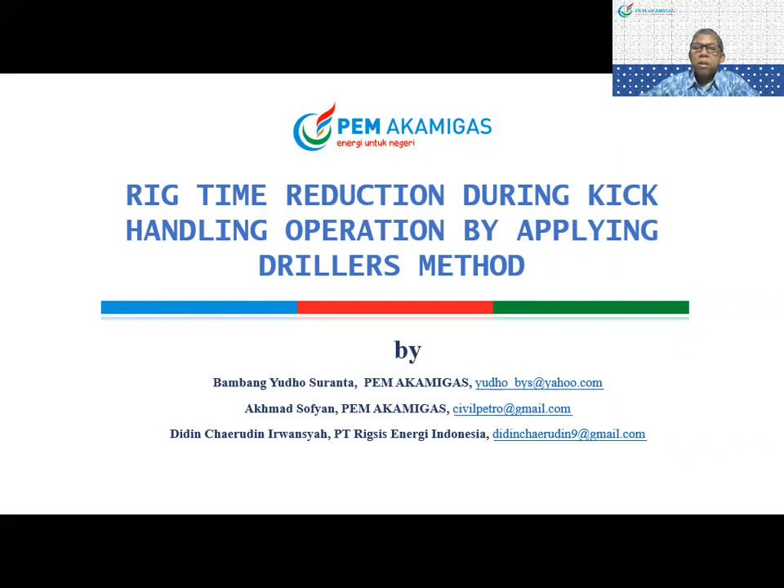Before we continue to the main presentation today, I would like to mention the outline of my presentation. There are 6 parts of main topic in my presentation. First, research background and objective. Second, kick handling and well control. Third, actual kick handling in exploration well X. Fourth, exploration well X kick handling analysis. Fifth, exploration well X handling recommendation. And the last, conclusions.

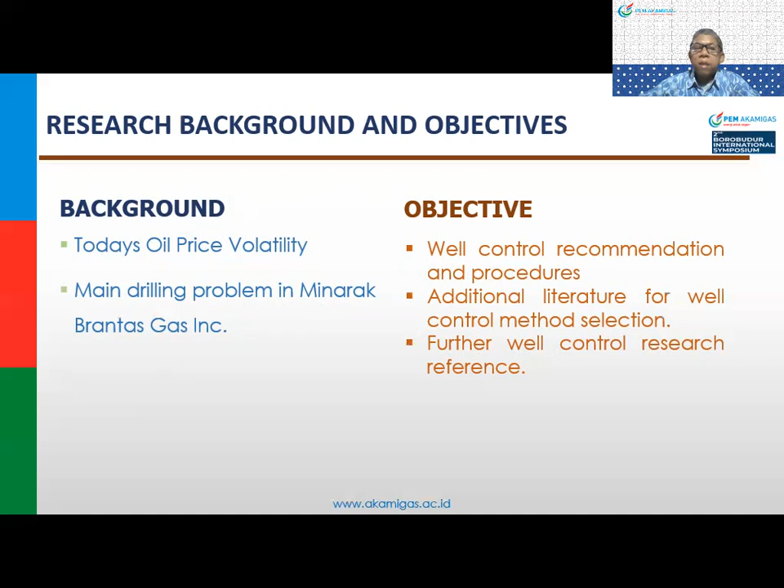Okay, we talk about research background and objective. On the background today is oil price volatility, so that we need efficient method and well control. We will focus to maintain the problem in Minarak Brantas Gas Inc., especially in well control. The objective of this research are well control, recommendation and procedures, additional literature for well control method selection and further well control research reference.

Next topic that I will describe is about kick and well control. In this topic, we will talk about what is the definition of the kick, the type of kick fluids, cause of kicks, kick indications, well control, and the last is well control type.

Okay, I will start from the definition of kick. Kick is an influx of unwanted formation fluid from within the formation layer to the inside of the borehole. The kick is usually water, gas, or oil. Kick occurs when gas suddenly enters the wellbore because the hydrostatic pressure is less than the formation pressure.

There are several signs of indication of kick. The one of indication of kick is pit gain, increase in pit volume. A gain in the total pit volume at the surface when there are no material being added at the surface indicates either an influx of formation fluid into the wellbore or the expansion of gas in the annulus.

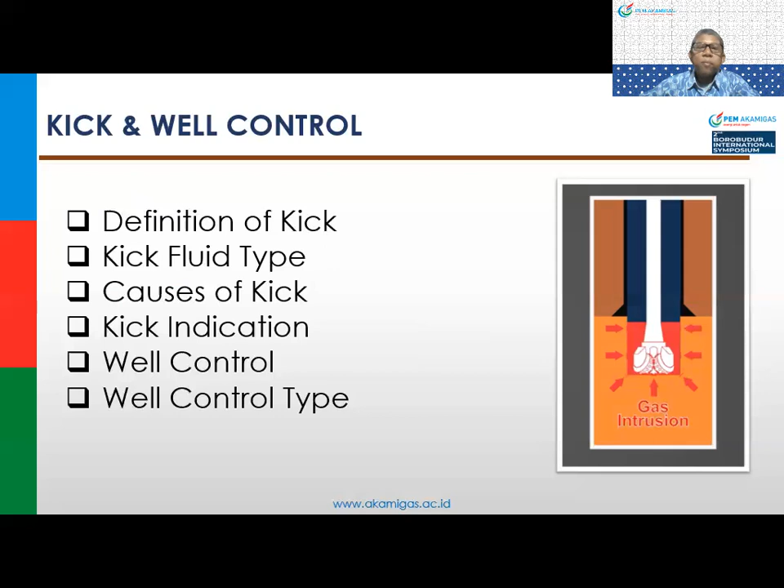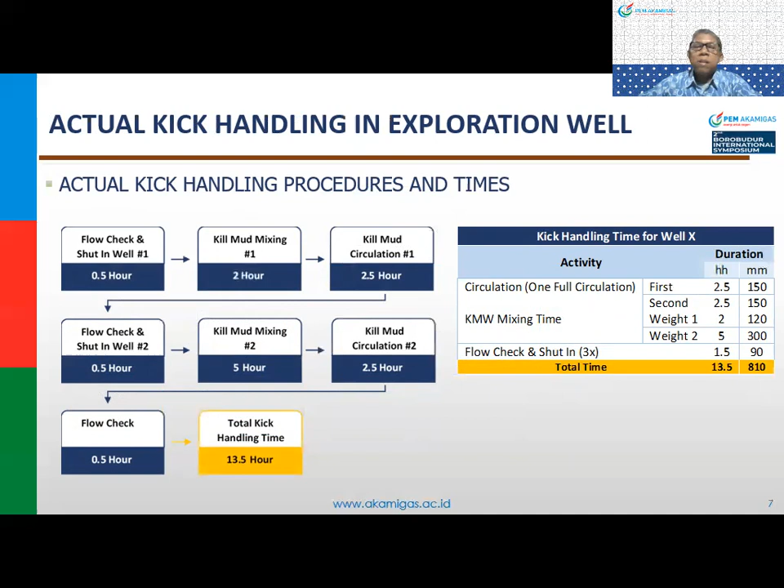We need some steps to handle kick as standard operating procedure with certain time needed when the flow is checked and shut in well. Need a half hour or 30 minutes to finish this process.

And this is the summary of kill mud mixing. The activity of method 1 is barite addition with duration 10.7 hours. The activity of method 2 is barite addition plus mix and replace with duration 3 hours. And the last, for method 3, the activity is mix and replace plus barite addition with duration 4.7 hours. So the total hours needed about 18.4 hours.

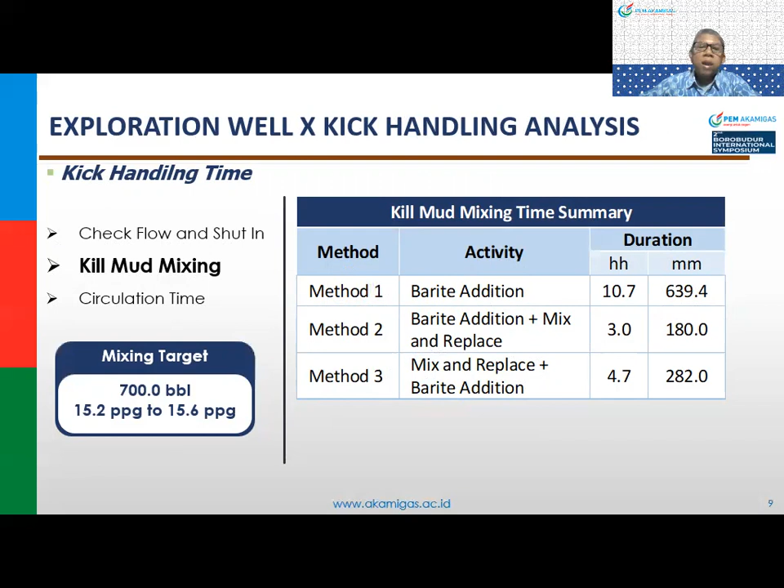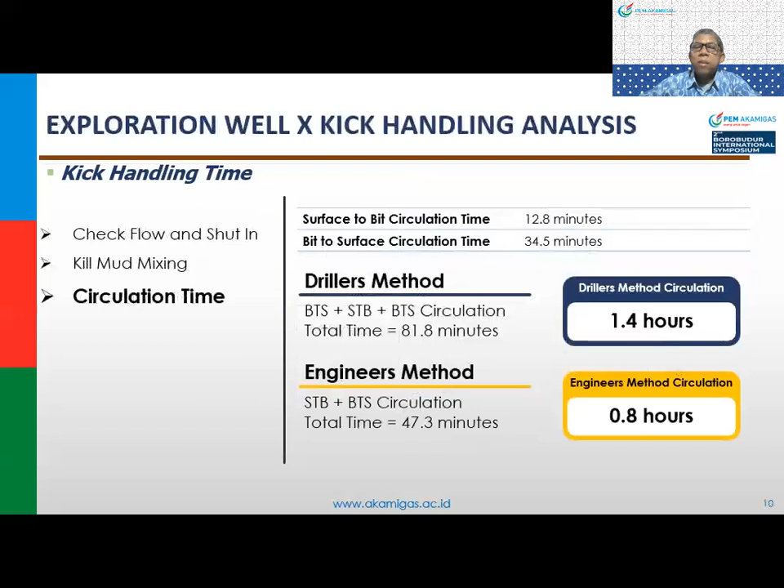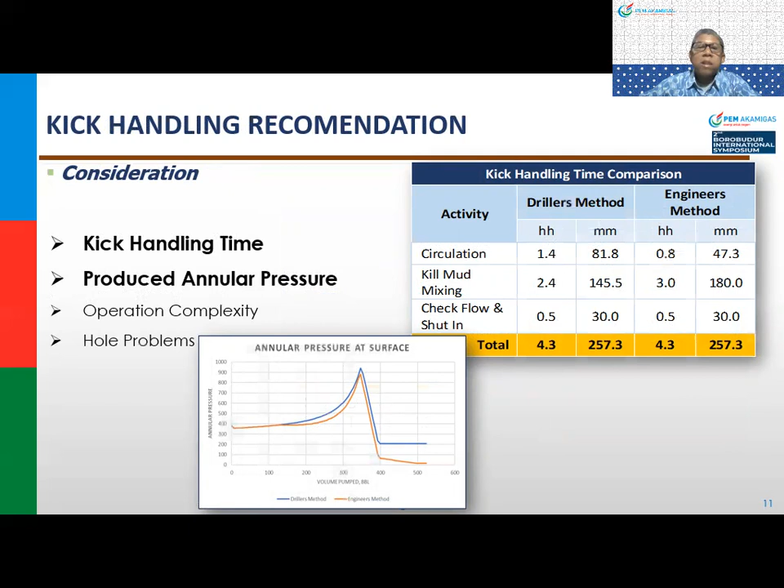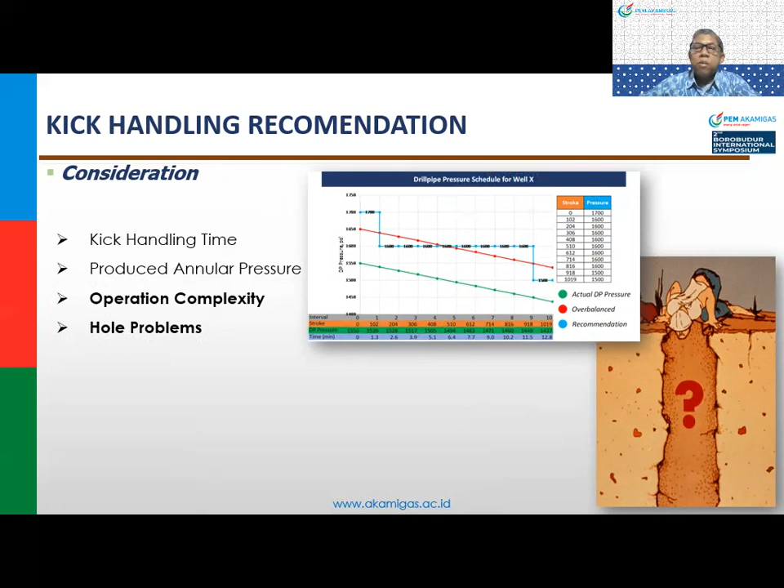And this is the graph of produced annular pressure between driller method and engineer method. The engineer method has annular pressure that is lower than the driller method. The problem may not occur when we use this recommendation as mentioned in the slide.

For kick handling recommendation and driller method, there are 4 points that we discussed. First, kick handling time. Second, produced annular pressure. Third, operation complexity. And the last, hole problems.

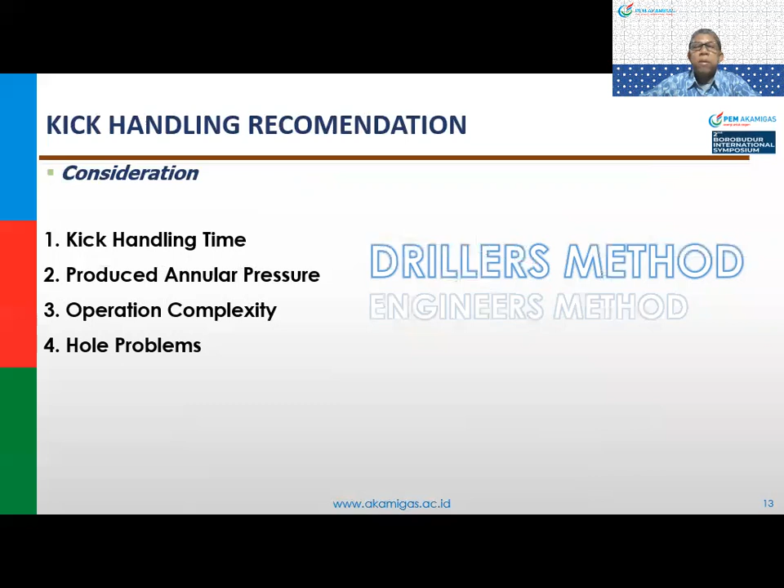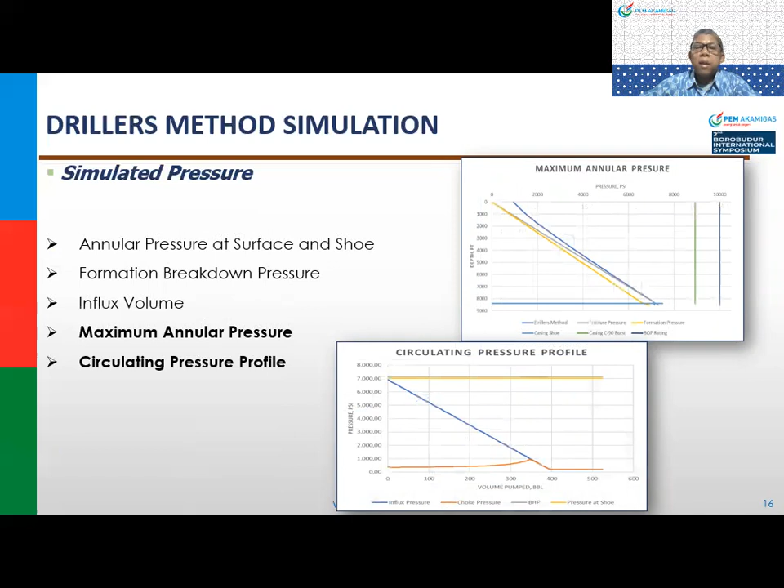The influx volume will increase with the influx migration time. Influx will increase until the top of surface and decline when the influx comes out from the well. This is maximum annular pressure graphic. The annular pressure is still safe because it is above formation pressure yellow line and below casing C-90 burst line. Circulation pressure profile is shown in the table, the blue line.

Finally, we have recommendation result that the efficiency of rig hours and cost saving recommendation are 9.2 hours and 2,300 US dollars.

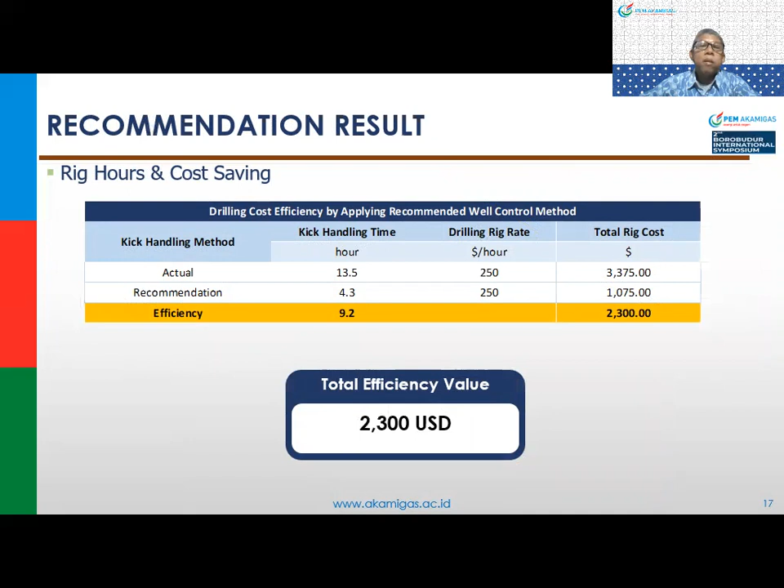For the conclusion from this paper, first, kick handling and preparation in exploration well is not optimum yet according to the handling time, number of trial arrangement. Second, mix and replace becomes the fastest kill mud mixing method despite quite large capacity in the tank needed.

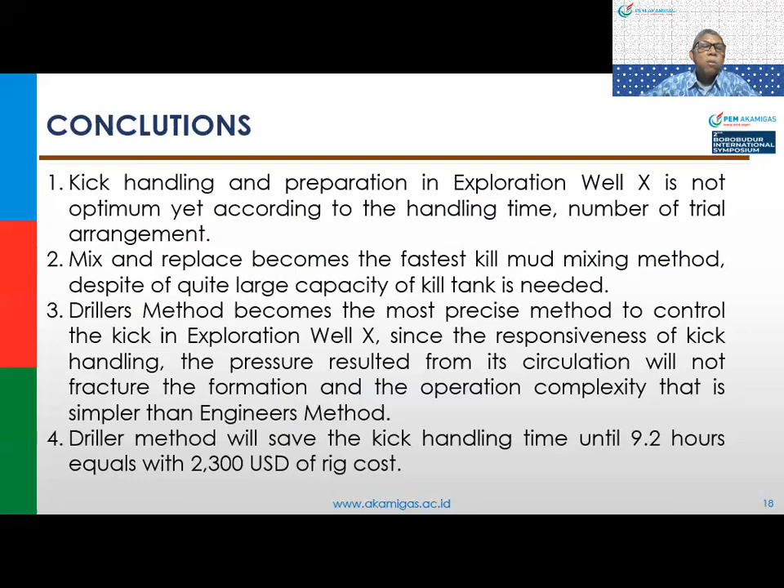The driller method becomes the most precise method to control the kick in exploration well X since the responsiveness of kick handling. The pressure result from its circulation will not fracture the formation, and operation complexity is simpler than engineer method. The method will save the kick handling time until 9.2 hours, equal to 2,300 US dollars of the cost.